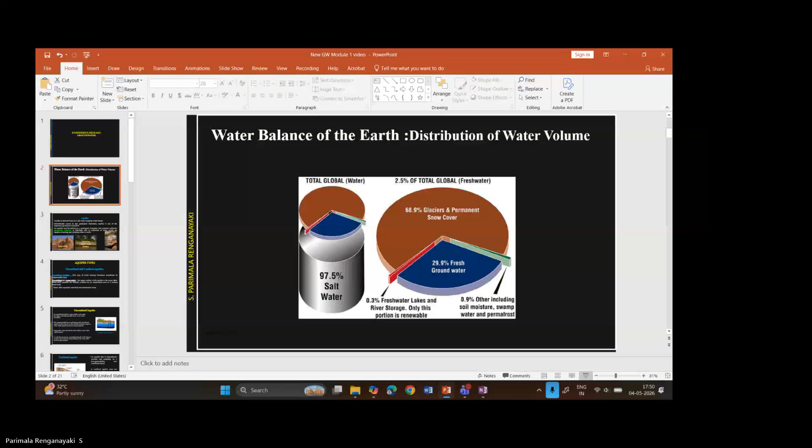So why is groundwater important? If you see the water balance of the earth, 97.5 percentage of water is present in the ocean, whereas only 2.5 percentage of fresh water is available at global scale. Even in that 2.5 percentage, almost 70 percentage is in the form of glaciers or permanent snow cover, which is not readily usable by us.

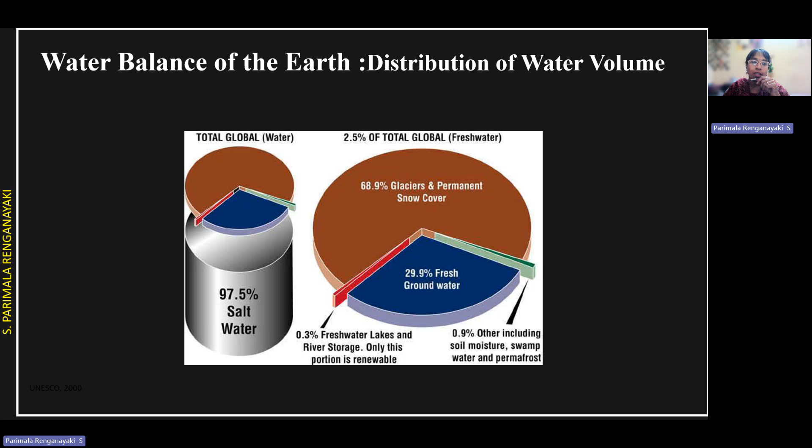0.9 percentage is included in the soil moisture, swamp water, or permafrost, which is also not usable by us. And 0.3 percentage is present in the fresh water in lakes and river storage. Only this portion is renewable for us. So in such a case, 29.9 percentage is fresh water available in the form of groundwater. Even surface water is mostly contaminated, which is not readily usable for us. So we mainly depend on this 29.9 percentage of fresh water, which is available within the ground. That is why groundwater is considered to be very precious.

Where is this groundwater stored? This groundwater is stored in the aquifer. So then what is an aquifer? Aquifer is derived from the Latin term meaning water bearer. That means it is one kind of geological formation. Geological formation means it can be rock, it can be clay, it can be sand, anything. All these are geological formations only.

But an aquifer is the type of geological formation which is capable of storing water, and when we put a well into it, it can yield a good amount of water. So groundwater occurs in any geological formation, but aquifer is one of the important geological formations. An aquifer may be defined as a geological formation that contains sufficient permeable material or lithological unit or collection of units which are capable of storing and yielding water, as I said before.

These are some examples of geological formations which are called aquifers. Sandstone has too many pores where water can be stored within it. Then alluvium - mostly this kind of geological formation is present near water bodies where more amount of water is absorbed and stored. Then basalt is also one kind of aquifer. These are examples of aquifer.

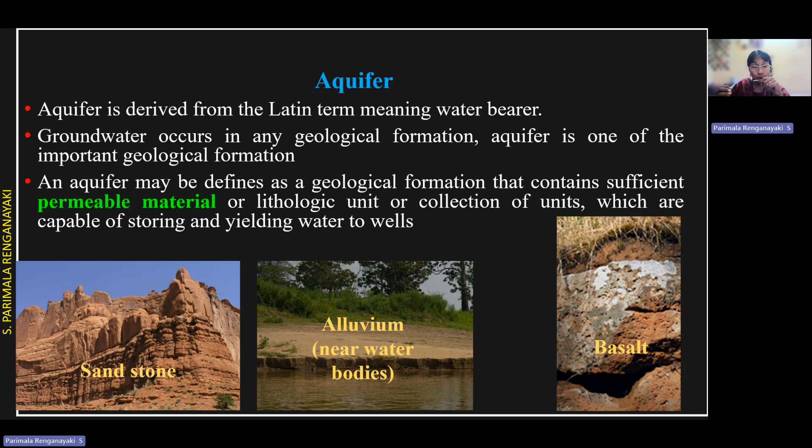Now you know very clearly, aquifer is a geological formation which is capable of storing water and also yielding water when we put a well into it. There are different types of aquifer - one is unconfined aquifer and the other is confined aquifer.

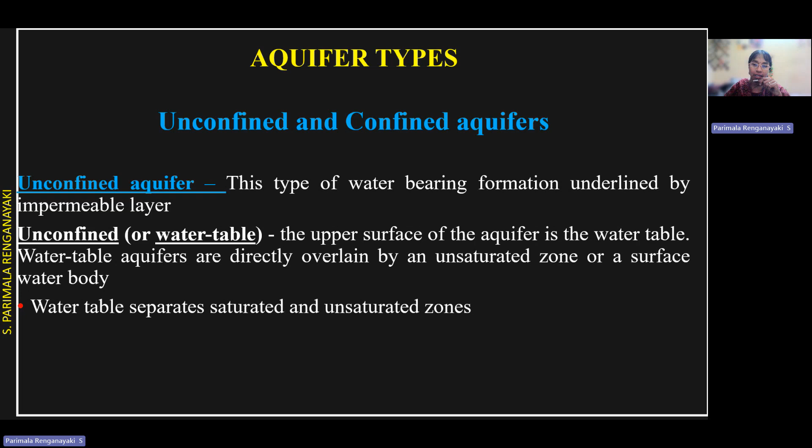Unconfined aquifer - this type of water bearing formation is underlined by an impermeable layer. This unconfined aquifer is also called a water table aquifer. The upper surface of the aquifer is the water table, and water table aquifers are directly overlain by an unsaturated zone or a surface water body.

This aquifer is underlined by an impervious layer. The impermeable layer underlying an unconfined aquifer is also known as free aquifer, phreatic aquifer, water table aquifer, or non-artesian aquifer. Depending upon the inflow and outflow, the water table will fluctuate. What is the meaning? In case it is raining, the water table will rise, so the aquifer thickness may be increasing.

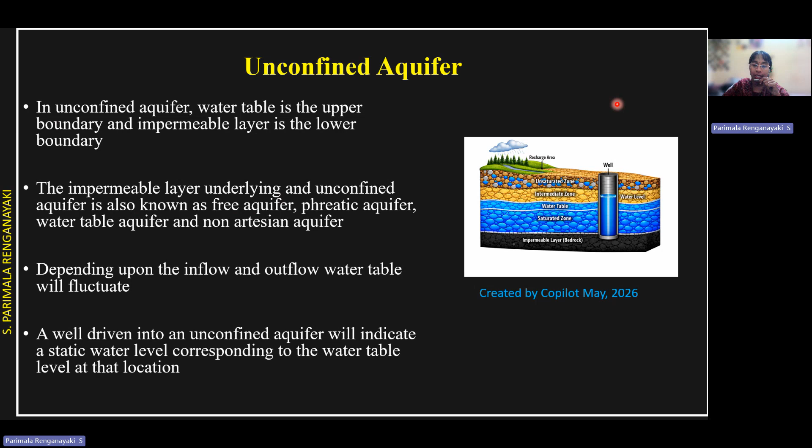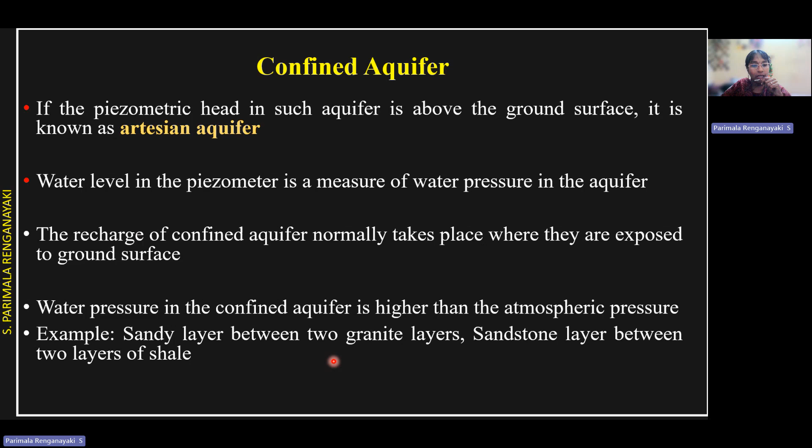Water pressure in the confined aquifer is higher than atmospheric pressure. Example: sandy layer between two granite layers, sandstone layer between two layers of shale. These are examples of confined aquifer.

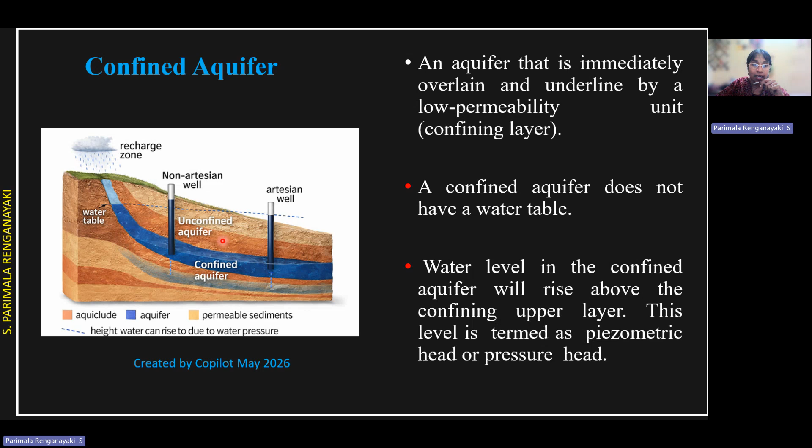Even sometimes it's called a leaky aquifer. Then there's aquifuge, an impermeable formation that cannot store water — at least clay can store some amount. But when you talk about aquifuge as a geological formation, it cannot store or transmit water. It has no conducting capacity, it has no pores. So that is what this impervious layer is. They are called aquifuge.

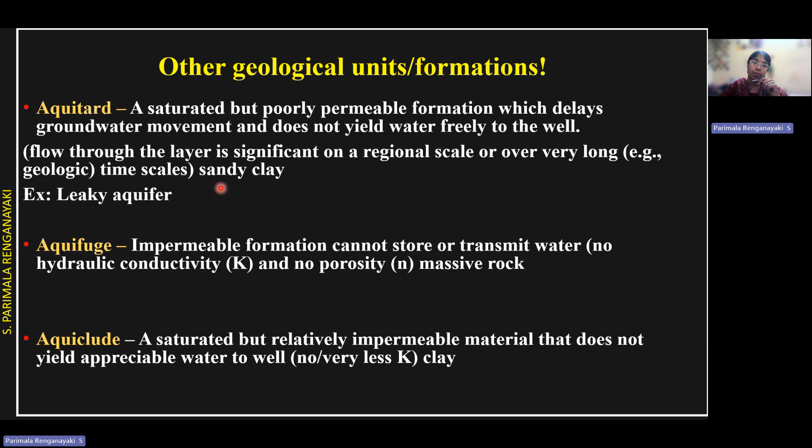Then there's aquiclude. It is also saturated, but it's a relatively impermeable material that does not yield appreciable water to a well. What is the difference between aquitard and aquiclude? Here it is completely clay. Here it is a kind of sandy clay, that is, clay is dominating but sand will also be present. These are other kinds of geological formations, but they cannot yield a good amount of water to a well.

Now let us study aquifer parameters. Our interest is on this aquifer only, rather than aquitard, aquifuge or aquiclude. It has certain parameters that describe how much water this aquifer can give out whenever we are drilling a well, or whenever it is raining, how much water this aquifer is capable of storing, and how much water it can recharge.

So these properties only decide the capabilities of that aquifer. What are those parameters? Porosity, specific yield, specific retention, storativity, transmissivity, hydraulic conductivity, hydraulic gradient, aquifer thickness, static water level — all these are considered to be aquifer parameters.

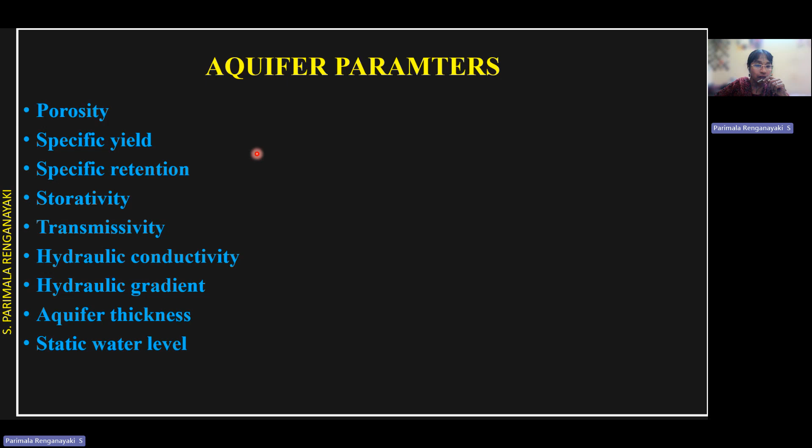Now let us concentrate on porosity, specific yield, specific retention and storativity. Let us see what is porosity. Porosity is nothing but the pores. You see here, these are some small sand grains where the water will be stored whenever it is raining.

Whenever it is raining, water will be stored in the pore spaces. Porosity is nothing but the ratio of volume of pore space to the volume of formation. It is usually denoted by N. Consider this the total volume, V. VV is nothing but only the pores present in it, the volume of voids. So porosity equals volume of voids divided by total volume, into 100%.

That is porosity. In reality, in the lab, how can we estimate the porosity? You can take one measuring cylinder and fill it with sand. Then simply pour water until it gets saturated. You measure the volume of water used to fill the pores - that volume is the volume of voids. From the cylinder's diameter and height, you get the total volume. This is a simple method, not very accurate, but it is one method used to understand porosity.

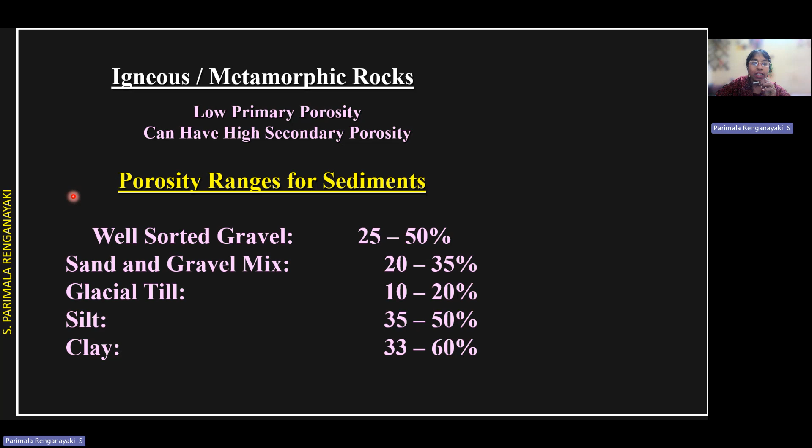Now let us see specific yield. What is specific yield? Here we had only sand in the ground. Now it was raining and completely filled the voids - assume the voids are completely filled with water. Specific yield is this: now we are putting one well in that aquifer, a small formation. How much water can be pumped out from this area, from this volume? That is called specific yield - the volume of water that can be drained by gravity or pumped against gravity from a given volume of an aquifer. Assume 100 cubic meters of water got into the aquifer in this cube.

100 cubic meters of water has gone into it. Now I am putting a well. We cannot always take out 100 cubic meters of water from the aquifer - only some amount can be pumped out, maybe 90 or 80 cubic meters. It depends upon the type of geological formation. The remaining 10 to 20 percent, approximately, will be held within the aquifer because of surface tension. So specific yield is just by gravity - even if you don't pull it out by pumping, if you simply drain the aquifer, that water will automatically come out. That is the amount of water - the volume that can be drained by gravity or pumped against gravity. This is the specific yield. Commonly, you could call this the drainable porosity.

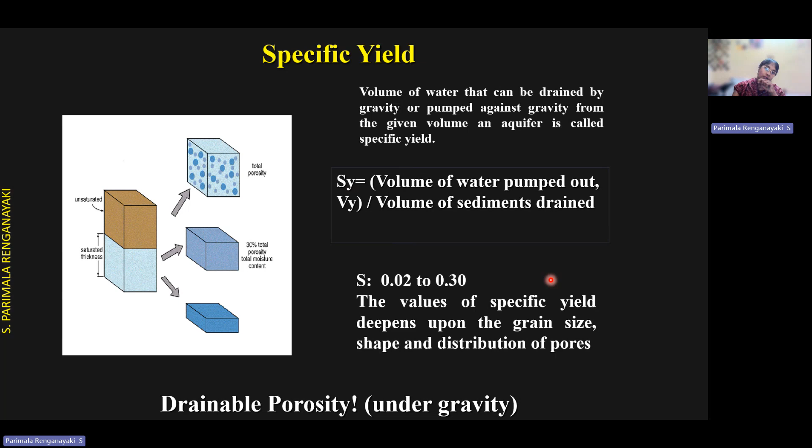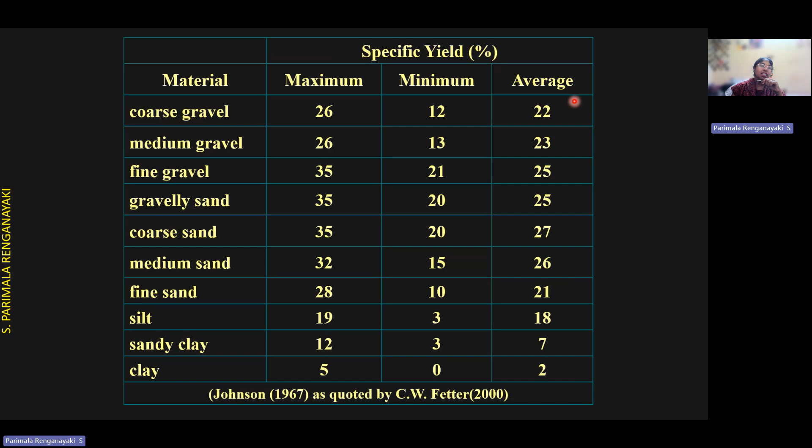Now, these are the various specific yield values for different materials - coarse gravel, medium gravel, fine gravel, and so on. On average, the specific yield will vary from 2 to 27. Aquifer material is always heterogeneous, so you see here 2 to 27 is the range of specific yield.

Now, specific retention. As I indicated before, whenever we are pumping out, it is not always possible to completely drain out the aquifer. Some amount of water will be held in between the pores due to surface tension. The amount of water held against gravity is called specific retention. So all water cannot be drained by gravity or by pumping from wells. Some portion of water is held in the void space by molecular and surface tension forces. This phenomena is called specific retention of aquifer.

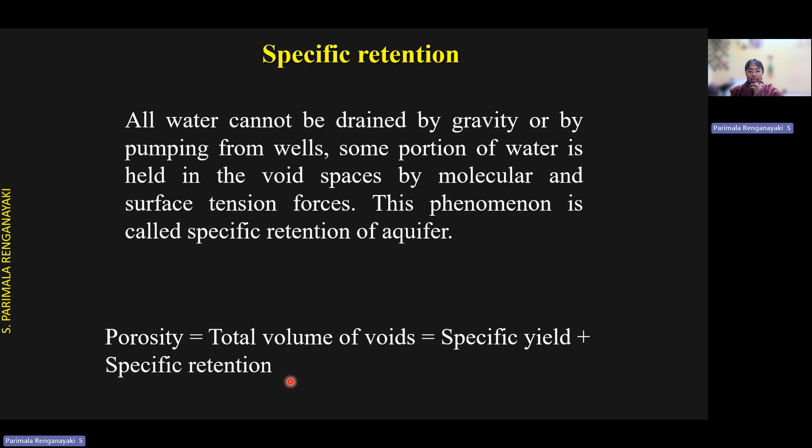So now, can we write like this? Porosity, which is nothing but total volume of voids, is equal to specific yield plus specific retention, because porosity is nothing but volume of voids. So now completely water is filled in that volume. Now some amount of water is pumped out, that is specific yield. Some amount of water is held in that space itself, that is specific retention. So porosity is equal to specific yield plus specific retention.

These are the specific yield values. Clay is 2%, silt 18%, sand 26%.

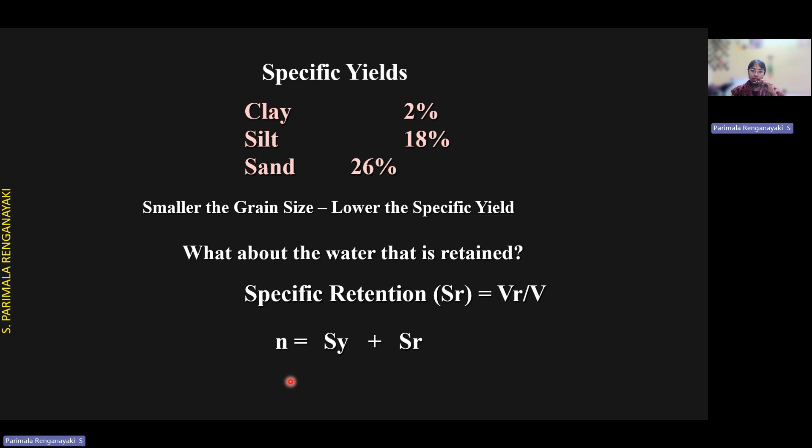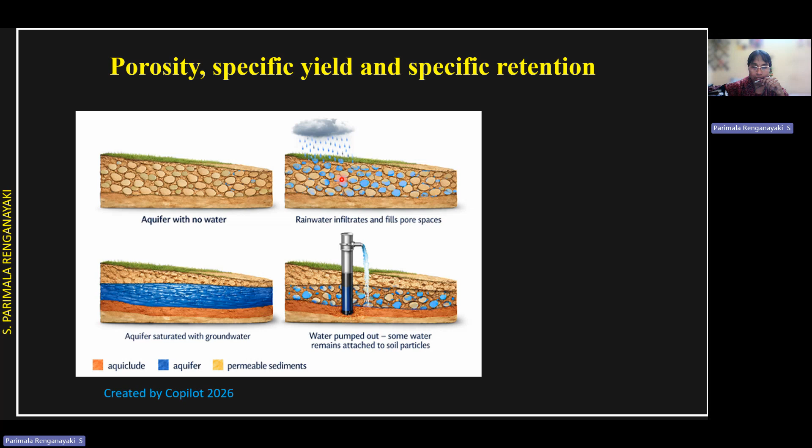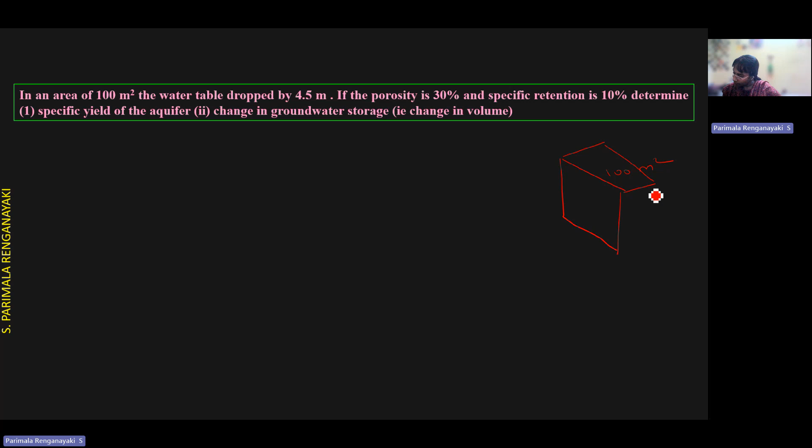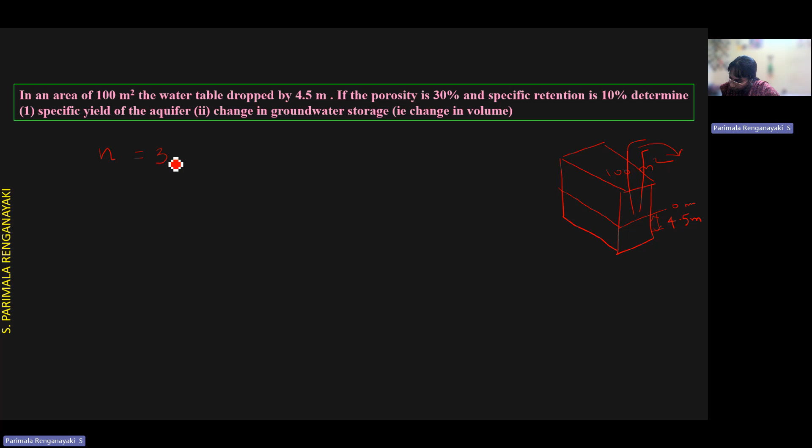Now let us do this problem. In an area of 100-meter square, assume it like this. Water table is dropped by 4.5 meter. Assume this is the initial water level, 0 meter. Now it is dropped, this entire thing is aquifer only, maybe we are pumping. The water level is dropped by 4.5 meter. If the porosity is 30% and specific retention is 10%, they are asking us to determine the specific yield.

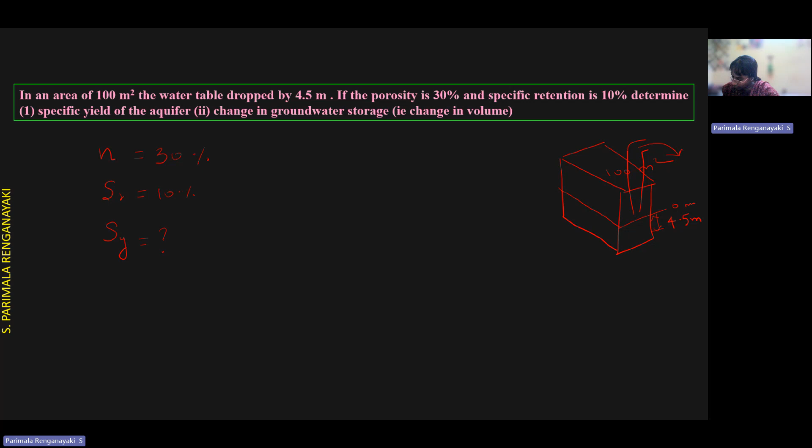We know the relationship: porosity is equal to specific retention plus specific yield. So 30% is equal to 10% plus specific yield. So now specific yield is equal to 20%. Now we got to know what specific yield is.

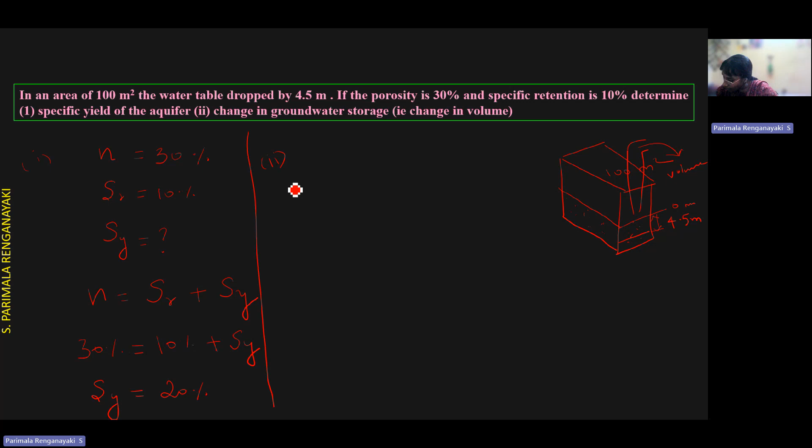The second part of this problem is change in groundwater storage. After they pump out, how much volume? Maybe this you had full of water here. Here now, this much is pumped out. That means how much volume we pumped out, or what is the change in volume, this is what we are trying to understand. For that also we have a formula.

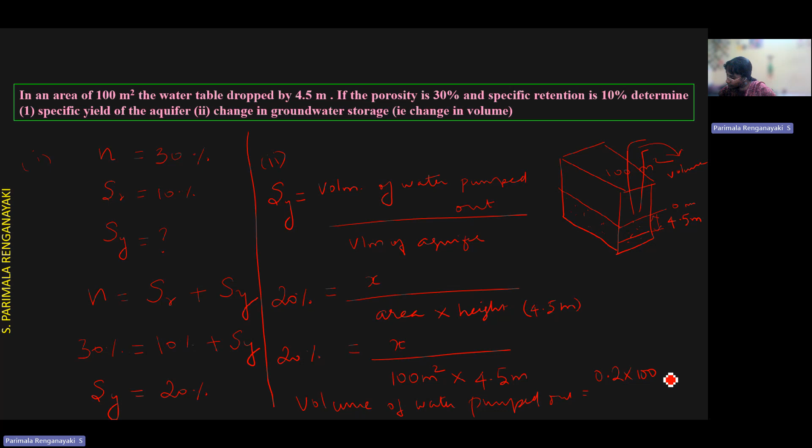Specific yield is equal to volume of water pumped out divided by volume of aquifer. Here specific yield is 20 percentage. We don't know how much is the volume of water pumped out. Volume of aquifer means the area into height, that is how much it is pumped out, the water table drop, which they have given as 4.5 meter. So 20 percentage into area, which is 100 meter square, for the height 4.5 meter, gives the volume of water pumped out, that is the change in groundwater storage. Volume pumped out is equal to 0.2 into 100 into 4.5.

So if you just check this, 0.2 into 100 into 4.5, it is 90 meter cube. 90 meter cube of water is pumped out from this aquifer. So this problem is over now.

If it is a tub, see, generally what we think, you have some bucket, okay, a rectangular kind of bucket or tin. Now simply if they say 4.5 and this is 100 meters squared, you will tell volume pumped out is area into height, 100 into 4.5. But it is held in between the sand pores, so we cannot simply write this as the volume of water pumped out from the aquifer.

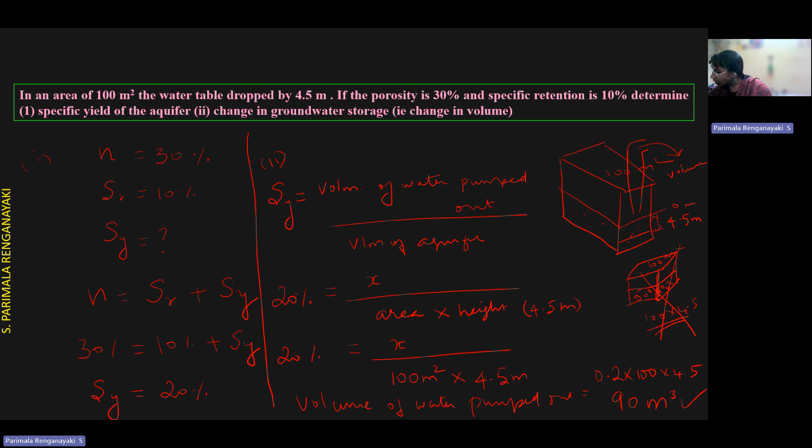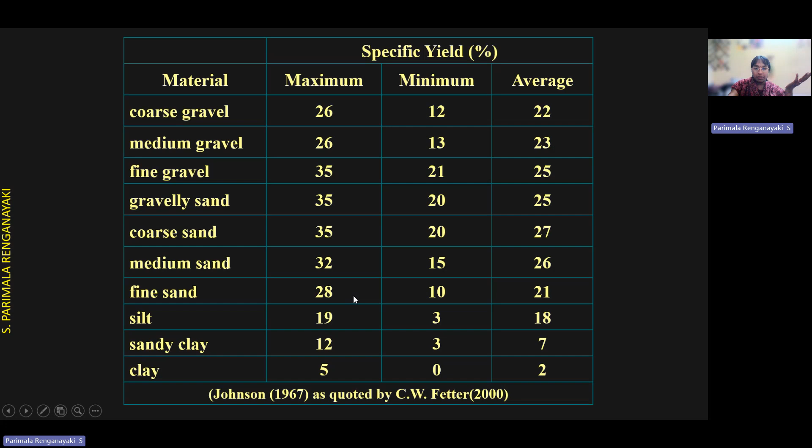So what kind of porosity is present in that? That is indirectly considered in the specific yield value of 20 percentage. So 20 percentage means what kind of aquifer approximately it is? It comes around silt to fine sand, that is the kind of geological formation present there. So generally specific yield is a term associated with the unconfined aquifer.

Now we are going to see another term, that is storage coefficient or storativity. That is the water that a permeable unit will absorb or expel from storage per unit surface area per unit change in head. This is also very similar to the unconfined aquifer concept. How much volume is pumped out from a confined aquifer, we term as storage coefficient or storativity. The storativity value ranges from 0.00005 to 0.005, indicating that large pressure changes over extensive areas are required to provide substantial water yield.

Same formula. If you want to pump out water from the confined aquifer, you need more area because of this storativity value. In case of confined aquifer, it is decline in piezometric level. In case of unconfined aquifer, it's decline in water table. Confined aquifer means whenever we pump out, we call it decline in piezometric head. In case of unconfined aquifer, we call it decline in water table. Definition wise, both are considered to be same.

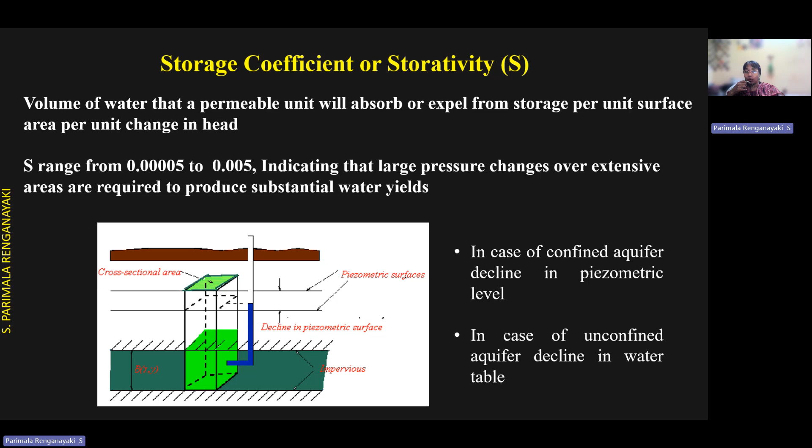Volume of water pumped out per unit surface area per unit change in head.

Now we will see some examples, useful for civil engineers or geologists. What scenarios can we have? Sometimes in one area it is raining. After the rain, for a given volume of rainfall over an area, some amount of water gets in. Because of that, how much does the water level improve in that area? We are going to identify this especially using specific yield and storativity.

Assume that there are two aquifers. One is in artesian condition. What does that mean? Artesian condition aquifer means confined aquifer. When we drill a well, the water, due to pressure, comes out of the ground level from the confined aquifer. A well drilled in the confined aquifer is called artesian condition. The storativity corresponds to confined aquifer, whereas specific yield corresponds to unconfined aquifer.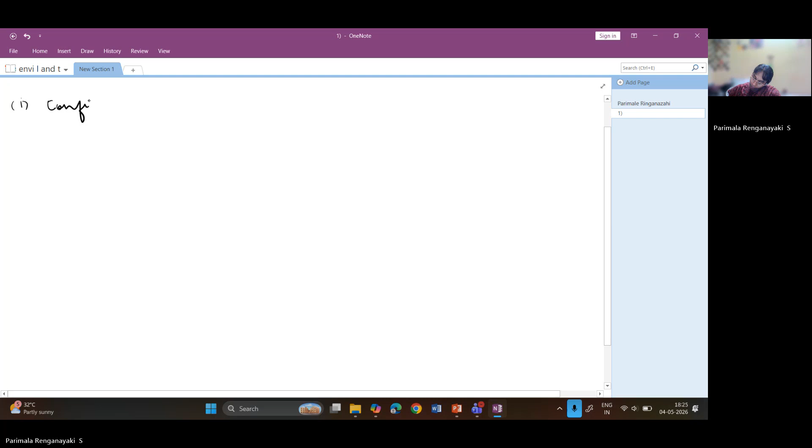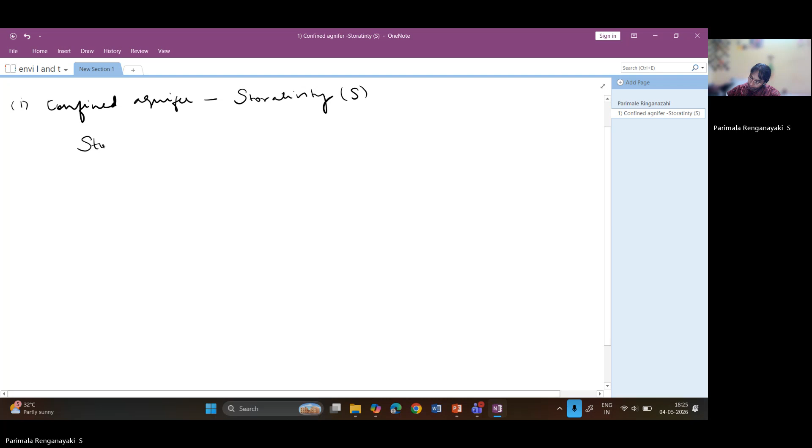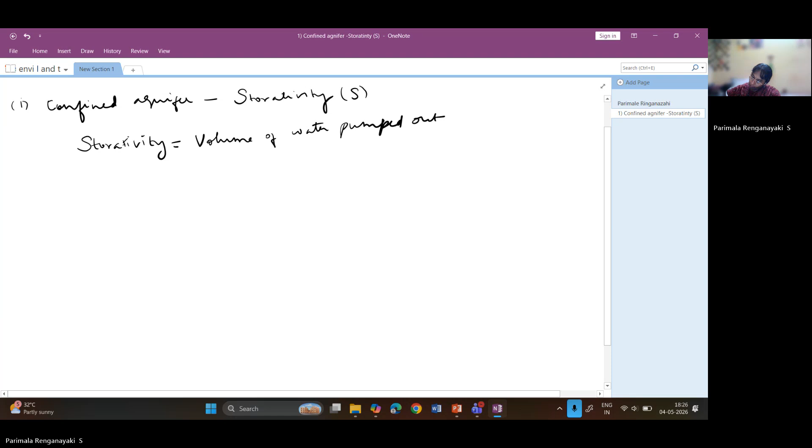So let us solve this problem. Case 1, we will consider it as a confined aquifer. Confined aquifer means storativity, same formula. Storativity is equal to what they are asking: volume of water pumped out. We will write the formula: pumped out divided by area into height of pumping, or decline in water level, or change in water level, whichever way you want to consider it.

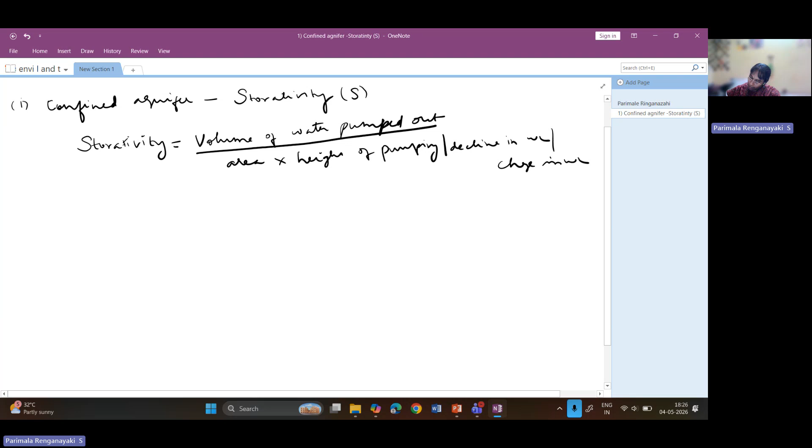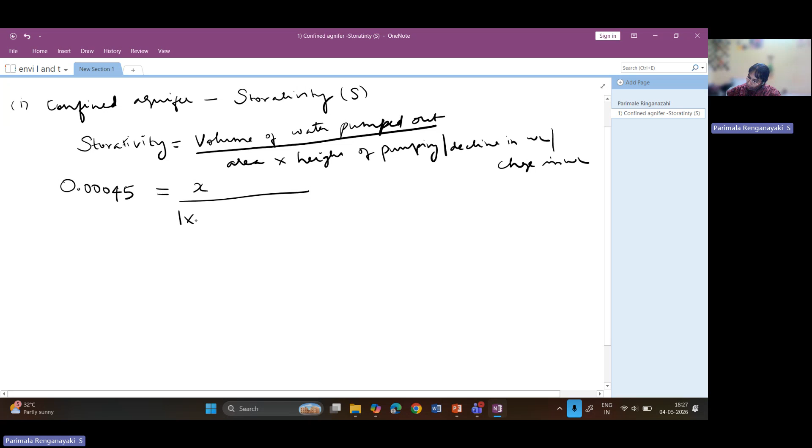In this problem, the given storativity for confined aquifer is 0.00045. This is unknown for now. Area is 1 kilometer square, and the change in hydraulic head is 2.3 meters. 1 kilometer square, kilometer is 10 power 3, so consider it as 10 power 6 square meters.

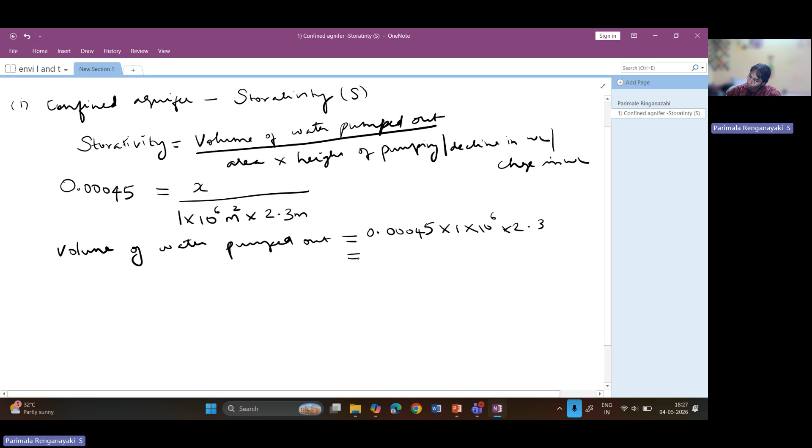Then decline is 2.3 meters. So now volume of water pumped out from confined aquifer is 0.00045 into 1 into 10 power 6 into 2.3. This is in meter cube. Let us see how much it comes out to.

If we calculate 0.00045 into 1 into 10 power 6 into 2.3, this comes around 1035 meter cube. Now they are also asking, if it is an unconfined aquifer condition, how much water would the engineers have pumped out?

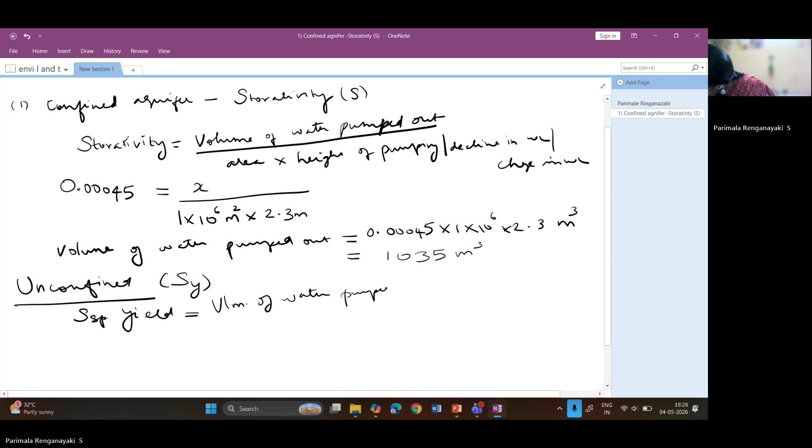Now this is specific yield. So specific yield is nothing but, same formula, volume of water pumped out divided by area into height of pumping.

So now the specific yield. What specific yield is given in this problem? The specific yield is 0.2. Same area only: 1 into 10 power 6 meter square into 2.3. Same decline also. In this case, how much is the volume pumped out?

So now if we just multiply everything: 0.2 into 10 power 6 into 2.3, which is equal to 4,60,000 meter cube. Can you note down the huge difference?

Same area, same water level decline, but from the confined aquifer we could pump out only 1035 meter cube, whereas in the unconfined aquifer, 4,60,000 meter cube of water we are able to pump out. This clearly shows that in unconfined aquifer, draining of the aquifer is taking place, whereas in confined aquifer, the pressure is getting released from the confined aquifer. We need more area in order to get less water.

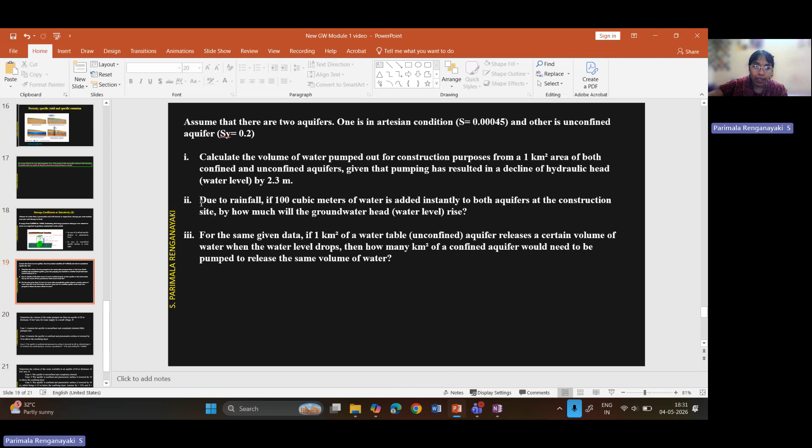Now let's do the second part of this problem. Now, due to rainfall, 100 cubic meter of water...

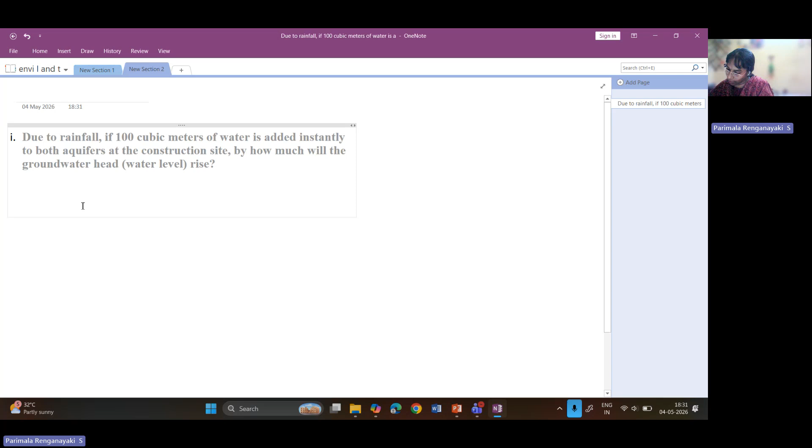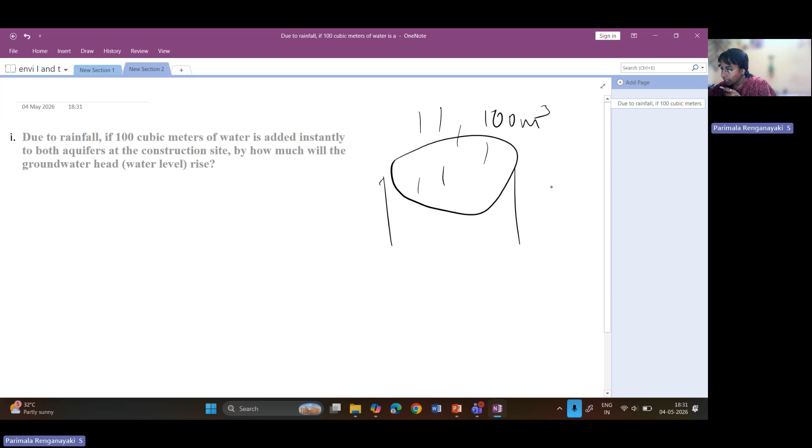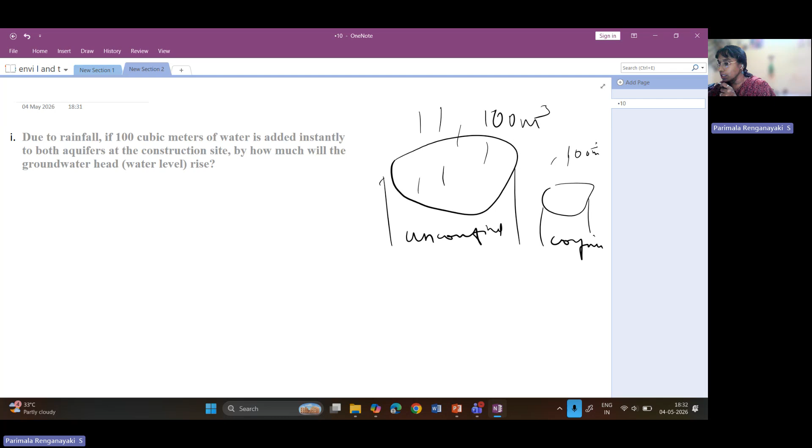Due to rainfall, 100 cubic meter of water is added. Assume this is your aquifer, and it is raining. 100 meter cube is raining and water is added instantaneously to both aquifers. Maybe your house is here and your college is here, and everywhere it is raining, 100 meter cube in each. Your house is located in an unconfined aquifer, and your college is located in a confined aquifer. How much will the groundwater head rise in both areas because of this 100 meter cube? This is what we want to know. Now let me assume.

Same formula: for unconfined aquifer, specific yield equals volume of water divided by area into change in height of water. Whether you pump out or add water, because of adding or pumping out, what is the change in height of water? For unconfined aquifer, specific yield is 0.2. Volume of water added to the aquifer.

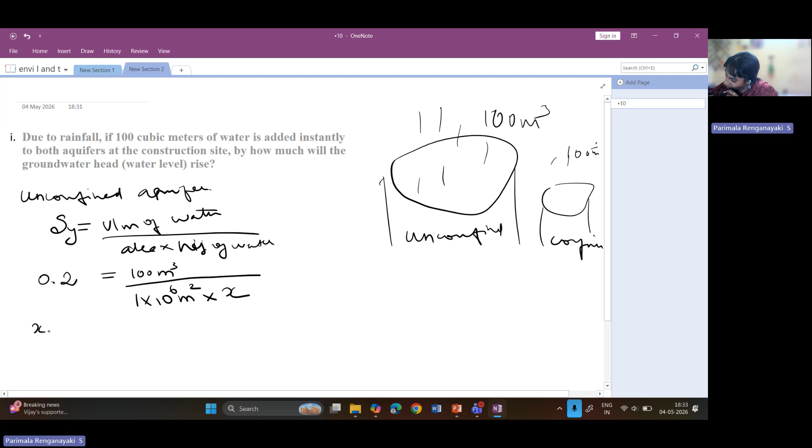Now it is raining, rain is falling, so this volume of water can be the amount pumped out or the amount added to the aquifer. Now in this case, the rainfall is coming, it is an addition of 100 meter cube, same area of 1 kilometer square, that is 10 power 6 meter square. We don't know how much is the change in height; H is unknown here. So what is the height? That is what we need to find out.

Near your house, which we consider as an unconfined aquifer, because of the rainfall, how much did the water level improve? So, X equals same 100 meter cube divided by 10 power 6 meter square into 0.2. Now if you see, 100 divided by 10 power 6 into 0.2, the change in water level rise is 0.0005 meter.

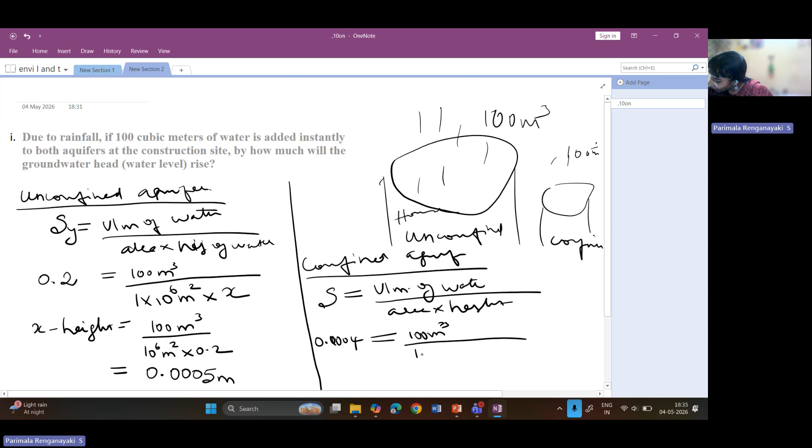Okay, now let us see how much water level rise took place in the confined aquifer near the college. For confined aquifer, we use storativity. Same formula: volume of water added or pumped out divided by area into change in height due to pumping or recharge. Here S is 0.0004. Volume added is 100 meter cube, divided by area 1 kilometer square, that is 10 power 6 meter square, into change in head. Now if we just see here, 100 divided by 0.0004 into 10 power 6, it is 0.25 meter.

So even for this small change, this much water can be recharged. But whereas here, only when we recharge or pump out, we need to decline 0.25 meter depth, then only we get this 100 meter cube of water. We can't get all the 100 meter cube unless we decline the water table 0.25 meter in the confined aquifer. Whereas here, if you decline it by just 0.0005, you will get 100 meter cube of water.

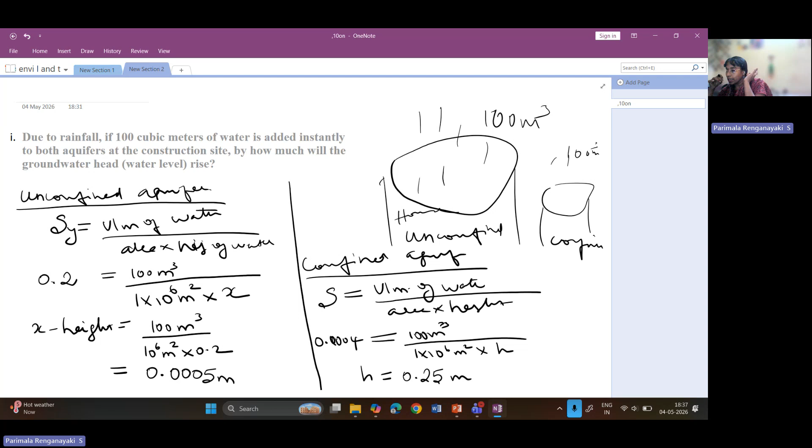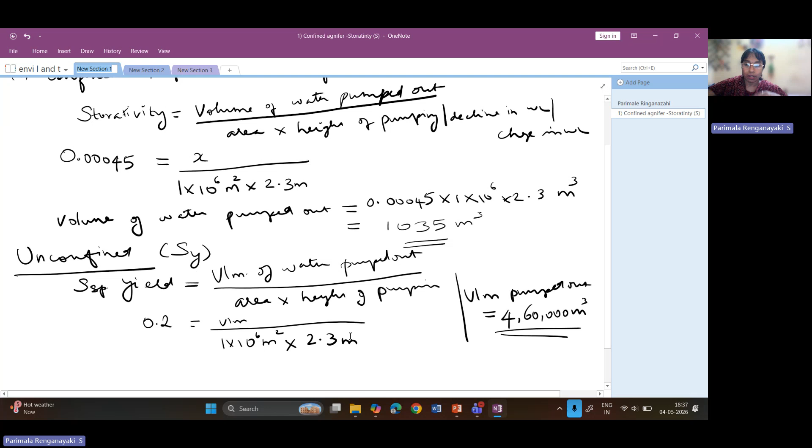Now let us see the third case. The third case is: for the same given data, if 1 kilometer square of water table aquifer releases a certain volume of water when the water level drops, then how many kilometer square of a confined aquifer would need to be pumped to release the same volume of water? Already we found out how much water we could pump out from the unconfined aquifer, that is 4,60,000.

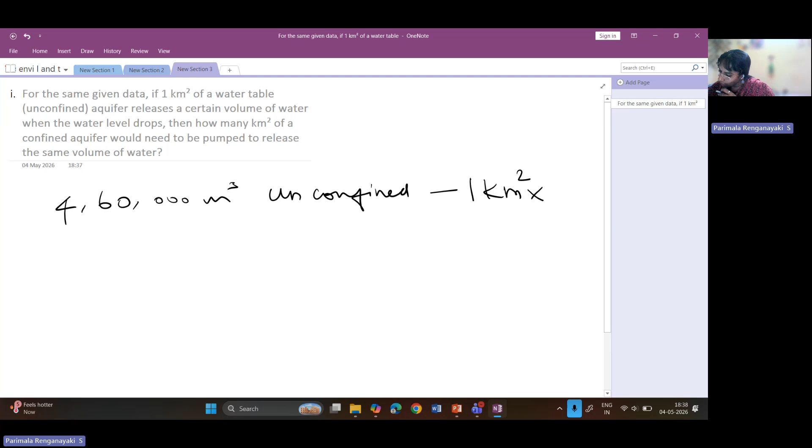We can pump out 4,60,000 meter cube of water from the unconfined aquifer. Now, for which area? For 1 kilometer square area, and decline is 2.3. Now they are asking how much area we need if we want to pump out the same volume from the confined aquifer. We'll use the same formula, don't worry.

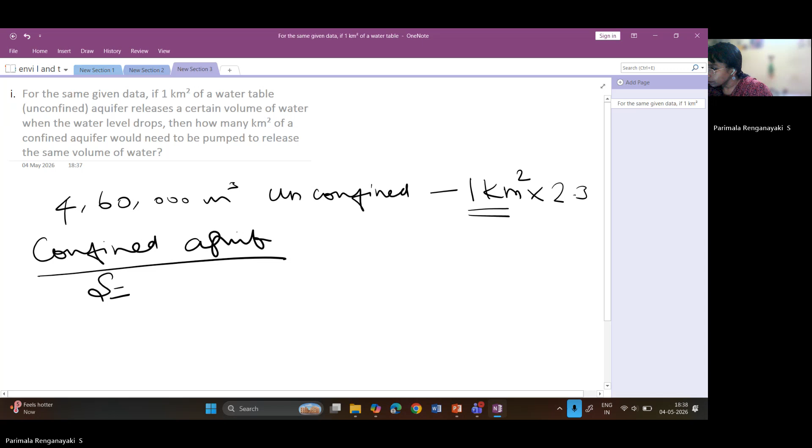Confined aquifer formula: storativity equals volume of water divided by area into height. So now, volume of water is how much we could pump out from the confined aquifer, this much amount. Area is unknown, that's what they are asking. Height is the same, 2.3. Now storativity is 0.00043. So for this, let us see how much area is required if you wanted to pump out this much amount of water.